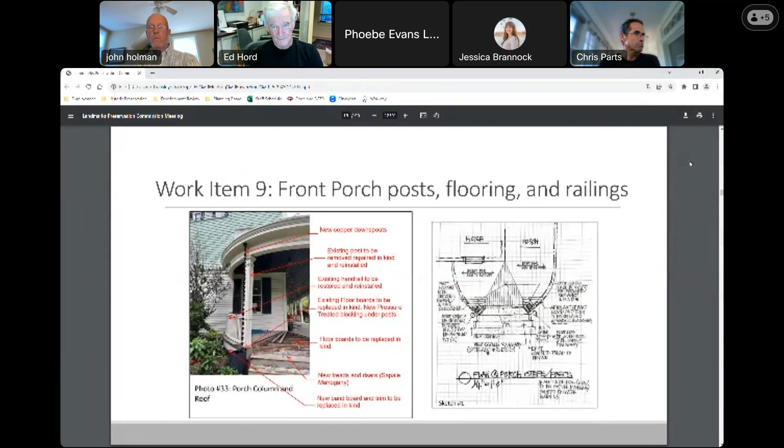And then the next is agenda item number 6. This is the Watkins property at 709 Clifton Road, Sudbrook Park, County Council District number 2. This is a contributing resource in the Sudbrook Park County Historic District, and the applicants are proposing an amendment to their previously approved Part 2 tax credit application for additional repairs and in-kind replacements to the front porch. Staff recommends to vote to issue a certificate of appropriateness as proposed, citing Baltimore County Historic Design Guidelines, Porches and Steps, pages 1 through 6, County Code Section 32-7-405 and

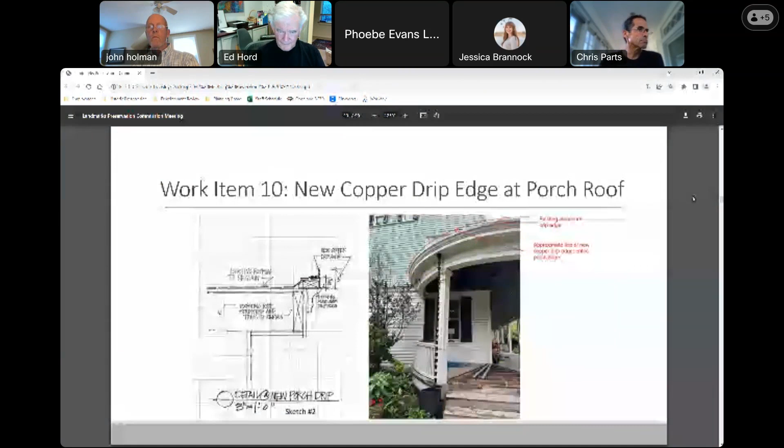11-2-201. Next, we have agenda item number 8, the Beverly property at 16202 Corbett Village Lane in Monkton, County Council District number 3. This is a contributing resource in the Corbett County Historic District, and the applicants propose to replace their non-historic metal barn roof. Staff recommends issuing a certificate of appropriateness as proposed, citing Baltimore County Design Guidelines, roofs, pages 1 through 13, County Code Section 32-7-405.

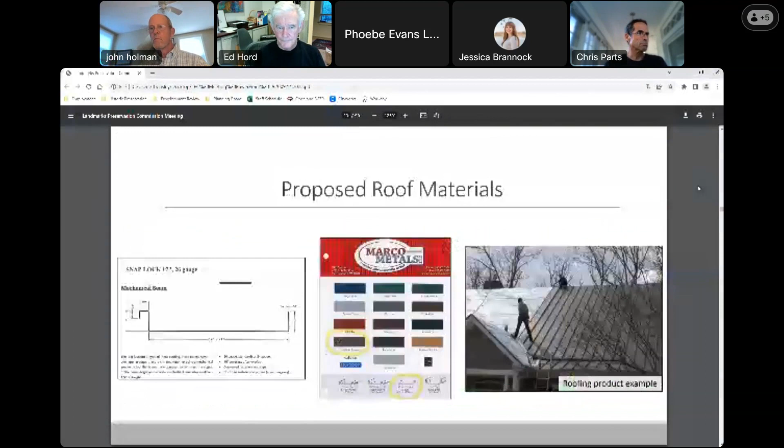Next, we have agenda item 11. This is the Quinn Oakham property at 110 North Beechwood Avenue, County Council District number 1. This is a contributing resource in the Old Catonsville National Register Historic District, and the applicants are seeking Part 2 tax credits for exterior gutter replacement. Staff recommends issuing a certificate of appropriateness as proposed, citing Baltimore County Historic Design Guidelines, roofs, pages 1 through 13, County Code Section 11-2-201.

Then we have the Carpenter property, agenda item number 12. This is located at 713 Pleasant Hill Road in Ellicott City, County Council District number 1. This is a contributing resource in the Oella National Register Historic District, and the applicants are seeking tax credits for repairs to the original German siding, exterior doors, porch, and windows. Staff recommends issuing a certificate of appropriateness as proposed.

And finally, we have agenda item number 13. This is the Bacon Crosby House at 2939 Monkton Road in County Council District number 3, final landmark number 62. The applicants propose to repair 5 existing windows and replace 31 non-original windows. Staff recommends issuing a certificate of appropriateness as proposed.

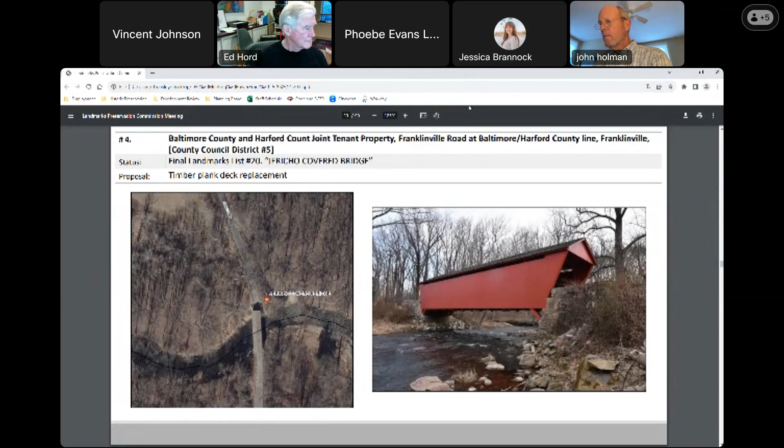So agenda item number 4, the Jericho Covered Bridge. This is a Baltimore County and Harford County joint tenant property at the Franklinville Road and Baltimore Harford County lines, County Council District number 5. This is final landmark number 20. And the applicants propose to remove and replace the timber decking and curb and scupper blocks on the bridge.

Just for some background, the bridge is an 86 by 13 foot Burr arch truss bridge that was constructed across the Little Gunpowder Falls in 1865 and connects Baltimore and Harford counties. The bridge was added to the final landmarks list on October 31st, 1978 through Council Bill number 101-8.

The existing bridge decking is 2x4 transverse timber planks nailed together on the vertical side. The existing decking was previously replaced in 2015 during a major rehabilitation project. The $1.7 million project was funded primarily by a grant from the National Historic Bridge Preservation Program, with Baltimore and Harford counties each funding a small portion. The 2015 rehabilitation project went through extensive reviews by the Maryland Historical Trust to ensure that the work met the Secretary of the Interior standards for rehabilitation.

Baltimore County Department of Public Works has requested to replace the current wood decking system. The application indicated that poorly connected deck planks, combined with the daily vibrations of traffic, have caused the planks to shift sideways, creating wide gaps between the ends of the planks and the bridge curb blocks. This has led to safety concerns for vehicles and pedestrians. In addition, several planks are showing signs of wear and tear, such as splitting off.

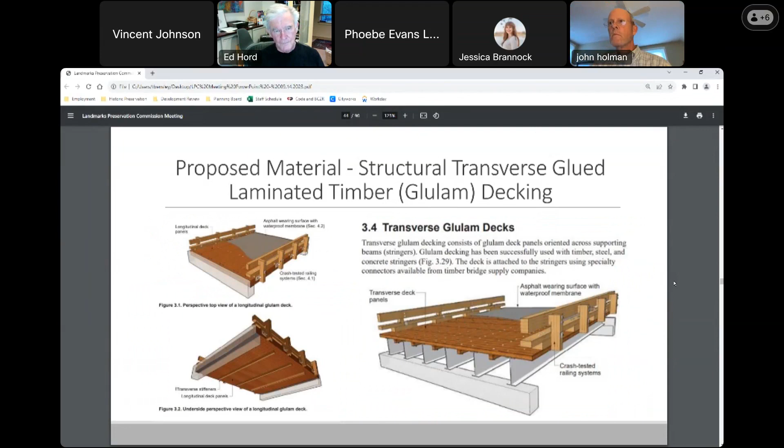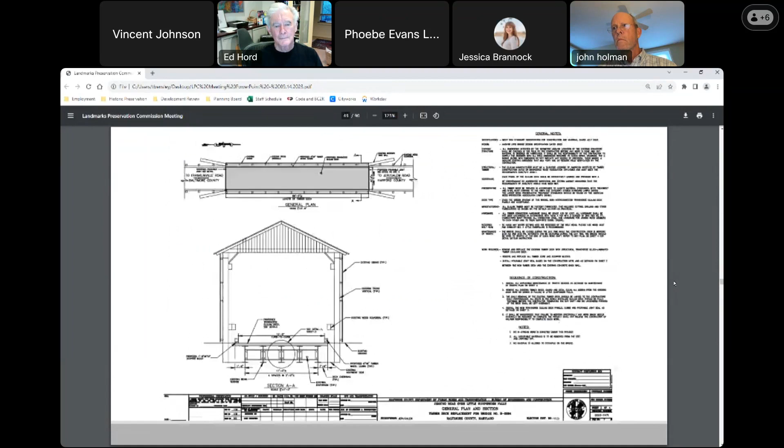The LPC has approved composite decking for historic porches on a case-by-case basis when the proposal replicates the width, profile, and other visual qualities of the existing material and doesn't cause a great adverse impact to the historic resource as a whole. The National Park Service's Supplemental Resource Guidelines for Rehabilitating Historic Covered Bridges recommends replacing in-kind or with substitute material only those portions or features of the floor system that are extensively deteriorated or missing, instead of replacing the entire floor system. It is not recommended to upgrade the bridge structurally in a manner that diminishes the historic character of the floor system, such as replacing floor beams or decking with non-wood materials or engineered timber.

While staff appreciates the applicant's desire to maintain safety, the current proposal does not meet our design guidelines, nor the Secretary of the Interior standards for rehabilitation for historic covered bridges. The proposal does not mention any kinds of repairs to the existing planks, nor does it propose the in-kind replacement of any deteriorated planks. In addition, the proposed replacement material does not replicate the existing plank width, texture, or other visual qualities of the existing decking.

Replacement with an alternative material undermines the extensive work that was done less than 10 years ago and will have detrimental impact to the original design intent of the bridge. Staff recommends to not issue a certificate of appropriateness, as the current proposal does not meet our guidelines nor the Secretary of the Interior standards for the reasons stated above.

Staff recommends that the applicant review the National Park Service's guidelines for rehabilitating historic covered bridges and return to the commission with a proposal for repairs to the shifted planks and in-kind replacement of deteriorated planks. So again, staff recommendation is to vote not to issue a certificate of appropriateness as proposed, citing Baltimore County Historic Design Guidelines, Porches and Steps, National Park Service's Guidelines for Rehabilitation of Historic Covered Bridges, County Code Section 32-7-405. Thank you.

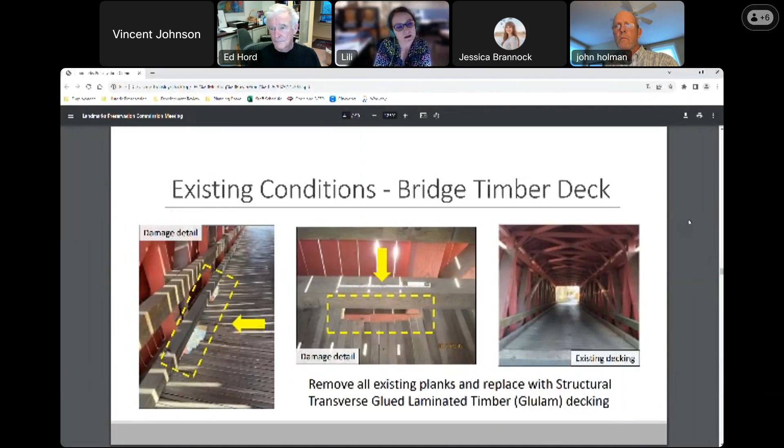And I agree with Ed that I think maybe what was replaced either is not the same thickness, or maybe the way it was connected is not quite what they originally had. So maybe there is a way to go back to installing something that can in fact last longer without the need to have the glulam. I understand that from a structural and heavier traffic standpoint, maybe you would need to shift, but I think there needs to be more investigation as to what was there originally, how long it lasted, and why it failed in a shorter amount of time. So rather than going full force and replacing it all with a newer material, it's about figuring out what the options are as far as the decking.

Good, thank you. I should insert that we had a friend of the court letter from the Harford County Landmarks Preservation Group that concurred with our staff, saying that it was not appropriate. And this bridge spans the river that's the dividing line, so I think technically they may have jurisdiction for some part of it over the water as well.

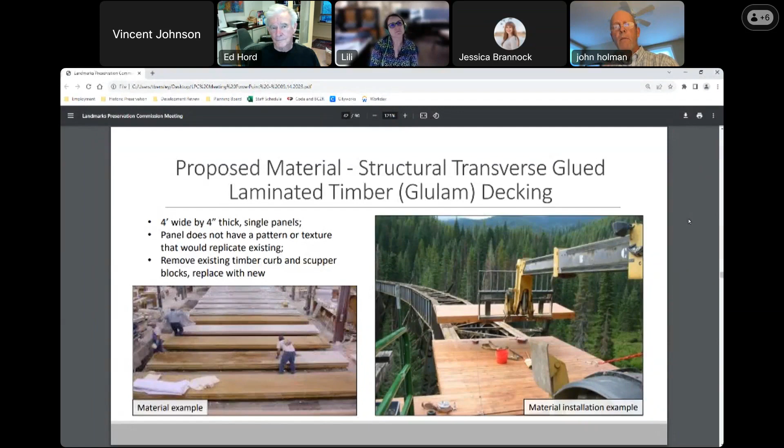Hearing the comments I've heard, do we have a motion to approve the staff recommendations? I would move that we approve the staff recommendations and do not issue the certificate of appropriateness as noted in the recommendations. Thank you, Chris. A second? I second. Thank you, Lili.

A second. So a vote yes, just to remind the commissioners, doesn't mean yes, they can go ahead. It means no, they can't go ahead. We're approving the, not to issue a certificate of appropriateness.

Can we have a roll call vote, Jessica? Yes, and just to note, John, Chris Weston has joined the meeting online. Yes, I cut him off on my phone once he sent me that. I wasn't trying to be rude, Chris, but I took you at your word. Thank you.

Can I have Chris Parts, please? Yes. Ed, Yes. Jamie, Yes. Lily, Yes. Phoebe, Yes. Vince, Yes. Chris Weston? You're muted. Yes. There you go. Thank you. And John, please. Yes. Great, thank you.

Okay, moving on to agenda item number 7. This is the Karas property at 504 Sudbrook Lane in Sudbrook Park, County Council District number 2. This is a contributing structure in the Sudbrook Park County Historic District. The applicant proposes an in-kind vinyl siding and shutter replacements.

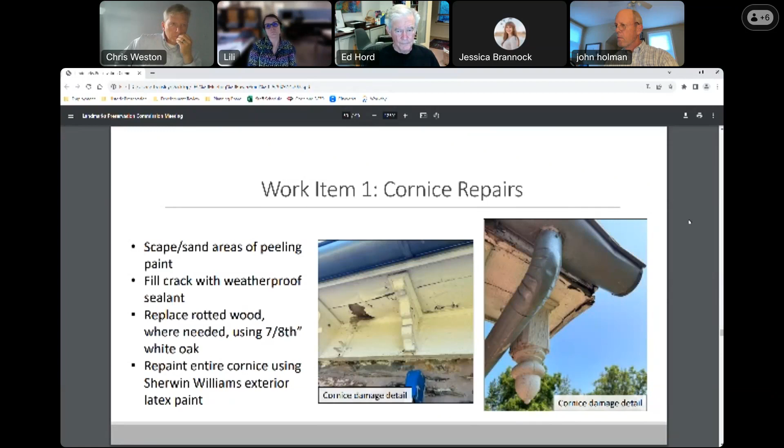Moving on to work item number 2, gutter and downspout replacement. The existing gutters on the south side of the house are 6-inch half-round galvanized steel that have rusted and pitted with holes. The applicant proposes to replace the existing section of gutter and associated downspouts in kind with new gutter and downspouts of the same size and material. Work item 3 concerns the dormers.

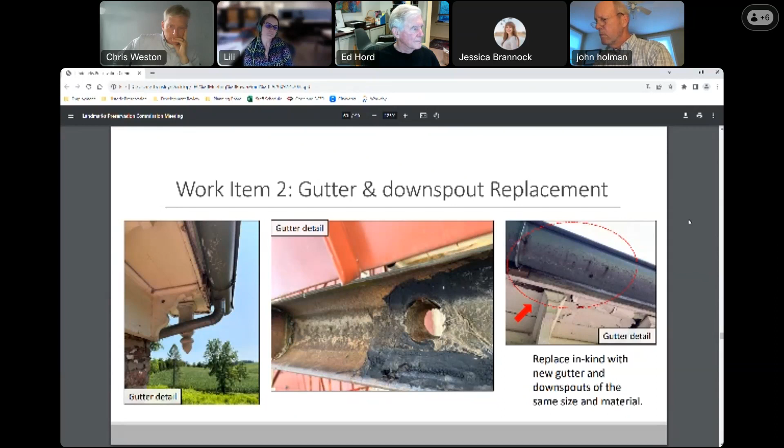There are 6 existing gable dormers clad in German wood siding with standing seam metal roofs that match the main house roof. There are 3 dormers on both the north and south roof slopes.

The existing siding shows evidence of rot in the lower corners due to improper flashing. In addition, the paint is showing signs of wear and weathering throughout.

The applicant proposes the following: to remove the rotted portions of siding only and replace in kind with new fir siding, reflash where needed using metal remaining from installation of the current roof in 2010, and repaint dormers with Sherwin-Williams exterior latex in the colors Creamy for the trim and Downing Sand for the siding.

Staff feels the proposed work description lacks details, but feels the proposed work will meet our design guidelines if the following conditions are met: first, replacement of siding should match the historic wood siding in shape, profile, finish, design, detail, and dimension.

Second, wood surfaces should be prepared for painting by removing any cracked or peeling paint by the gentlest means possible, such as hand sanding in conjunction with chemical strippers, which is generally recommended. A number of commercial paint stripping agents are available of varying strengths and purposes; select the agent most appropriate for the materials and conditions of the building, and do not sandblast or pressure wash wood surfaces.

Finally, number 3, wood surfaces should be primed prior to repainting. Staff recommendation is to vote to issue a certificate of appropriateness with the conditions outlined above, citing Baltimore County Historic Design Guidelines: windows and doors pages 1 through 8, roofs pages 1 through 13, and facade materials pages 1 through 12, County Code Section 32-7-405 and 11-2-201.

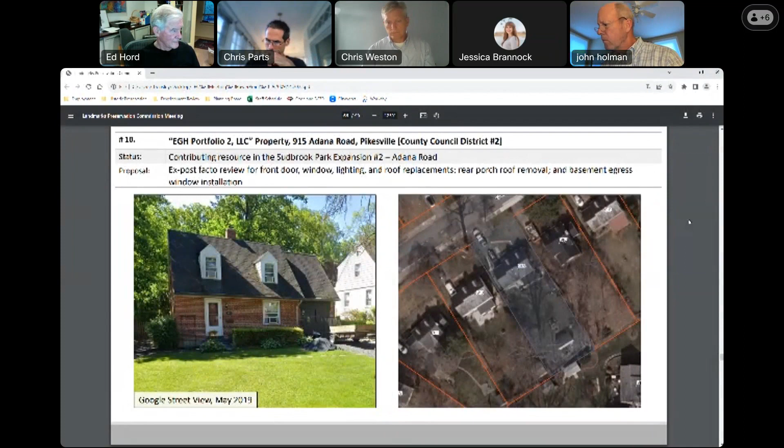This is an ex post facto review for the front door, window, lighting, and roof replacements, as well as the removal of the rear porch roof and the installation of a basement egress window.

The property at 915 Adana Road is a two-story brick dwelling constructed in 1942 and is a contributing structure within the Sudbrook Park County Historic District expansion, Number 2, Adana Road. The property was purchased by Evergreen Homes, EGH Portfolio 2 LLC, in February of 2023.

Staff became aware of the alterations made to the exterior of the home when a permit was submitted for a basement egress window opening in August 2023. A code violation has not been filed for the work previously completed. The present proposal includes information about work completed without LPC review, including window, front door, and roof replacements, rear porch removal, and basement egress window.

Work item number 1 is the front door replacement. The previous front entry door was wood and can be seen in old real estate photos, which staff has provided to the commission along with the meeting materials packet. From that photo, staff notes the previous front entry is not the original door; it was a flat door without panels and a diamond-shaped light at the top.

The previous front entry was replaced with a 36 by 80 inch Craftsman unfinished smooth left-hand swing fiberglass door. The prevailing front door style in the district appears to be a single leaf with divided lights on the top half and paneled at the bottom half. While the replacement door does not match the prevailing style and is not the most appropriate choice, staff does not feel it is a substantial detriment to the district and recommends approval with a notice to proceed as completed.

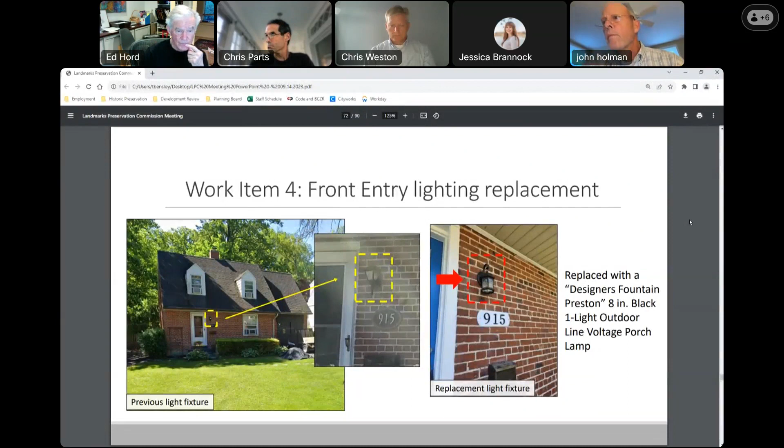Work item number 5: the basement egress window. The basement has been finished and includes a separate bedroom. The basement currently only has 2 window openings, one on the front elevation below the living room window and one on the side elevation. The previous window was too small to be considered egress size at 31.5 by 31.5 inches, and because of code requirements for having a basement bedroom, an egress window well was installed using the existing opening on the front elevation.

The window well measures 36 inches from the building front with a depth of 44 inches, with a permanent ladder. It will have a low profile cover built on an angle so as to divert water away from the property, and it will also be hidden by the landscaping and mulch garden around it. Staff recommends approval as completed.

Finally, work item number 6: the rear porch removal. Though not described in the application's description of work section, it was noted in the photograph submitted by the applicant. A ground level concrete patio located on the rear had a 1-story shed roof supported by simple wood posts that appeared unstable. It was removed, and staff has no issues with its removal, as it's located in the rear, and recommends approval as completed. So the following staff recommendations are as follows.

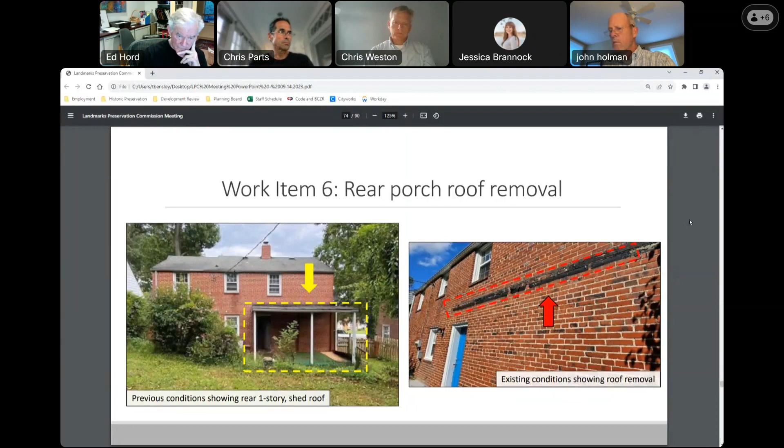For work item number 1, to issue a notice to proceed as completed.

Work item number 2: issue a notice to proceed as completed for the window replacements on the side and rear elevations only, and not issue a certificate of appropriateness or notice to proceed for the window replacements on the front elevation, but instead issue a certificate of appropriateness for the removal of the vinyl windows on the front facade, which include the two 6/6 dormers and one 6/6 living room window, to be replaced with new windows that match the original in material, light, sash, and other components.

Work item number 3 through 6: issue a notice to proceed as completed, citing Baltimore County Historic Design Guidelines, windows and doors pages 1 through 8, roofs pages 1 through 13, County Code Section 32-7-405. Thank you, Jessica.

It's a lot to take in. Is the owner or representative with us? Let me pull up our attendees list. Yes, we have Spencer Brown and Greg Mogavero from Mogavero. Spencer Brown, we're on the line.

Great, thank you for joining us. I'm going to turn it over to the commissioners to see if they have any questions or thoughts, and we'll come back to you as needed. I think the staff recommendations are spot on. Thank you, and any other thoughts?

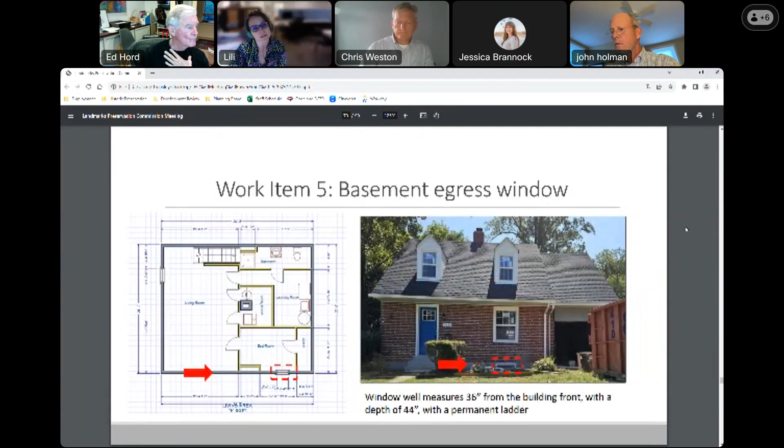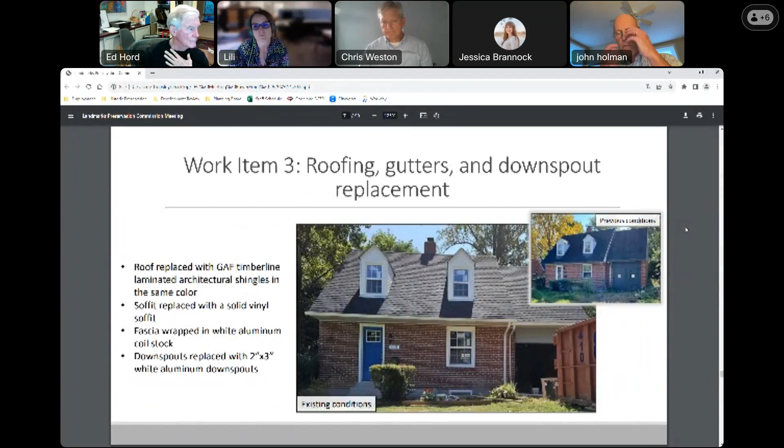I have a question on the garage doors. Are they remaining currently, or have they been replaced? Yes, the garage door has been replaced to look exactly like the garage door that was originally there. The garage door that was there was in disarray, we had to remove it. It was unsafe, not hinged properly, and looked like it could have caused injury. So we removed it and rebuilt it to look exactly like the old existing one and the ones across the street.

They all match. So is it an overhead door or carriage door? No, it is a barn style door, left and right opening out, with a latch in the middle. The hinges are very similar to what was there, black hinges, and there's a black handle on each door. Okay, thank you. Thank you, Lili.

Any other questions or concerns? I have a problem with the side windows as well, because I think you'll be able to see those from the street. The front ones are certainly the most important, and definitely those should be replaced with wood to match what was there originally. But I would add the side windows because I think they're visible, unless I'm missing something. I'll go with the consensus, but I would.

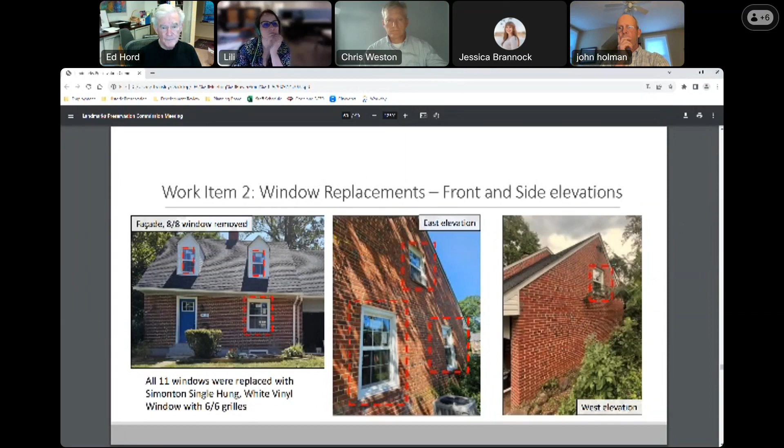So do we have a better picture, Jessica, a different picture that shows a street view that might help Ed with that thought? Some of our images were taken from street view, I can try to pull something up. I think you had one, particularly the west or east side. Let's move up to the second slide. Yeah, that's pretty visible, sort of at an angle. Is that what you mean, Ed, where you can see it? I think it's pretty visible from the street.

Any other commissioners share that concern? Maybe not. Okay, then consensus. I can't quite tell which angle we're looking at, but certainly there is a way for you to see them from the street.

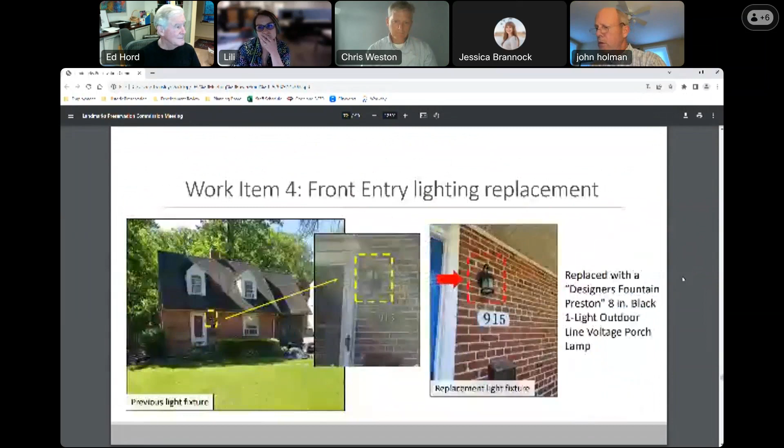Hearing no other comments, do we have a motion to approve the staff recommendations? I move that we approve based on the staff recommendations. Second. Thank you, Chris, and thank you, Chris, for that. So may we have a roll call vote? Chris Parts, please. Yes. Ed, please. Yes.

Jamie. Lili, yes. Edie, yes. Vince, yes. Chris Weston, yes. And John, please. Yes. And to the owners, thank you so much for joining us and being available for questions, we really appreciate that. Thank you.

Thank you. And I would just note to the owners that the work to the garage door, which was not detailed in the application, will also need to come back for ex post facto review by the LPC. Okay, thank you. Okay, all right, thank you, great, thank you.

All righty, and now we are moving on to agenda item number 14. Wow, all right, that's it. Yes, our last one, you're doing great, Jessica. If you can just keep the stamina up, didn't think we'd see the day.

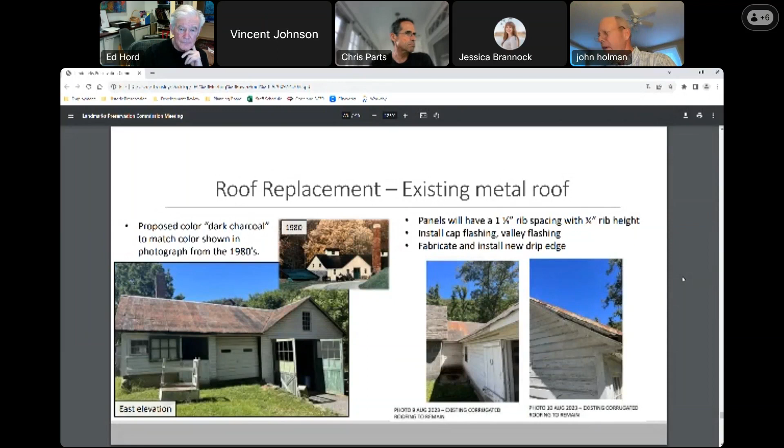Thank you. It's a fascinating building. Are the owners with us? Yes, we have Lisa Reed on call. Lisa, you're unmuted if you have anything to add.

Hi, can you guys hear me? Yes, we can, Ms. Reed. Thank you. Do I have anything to add? I think I will not add anything at this time. Okay, thank you for listening. I'm very excited to start work on this building. I'll open it up to the commissioners for any questions, comments, or thoughts.

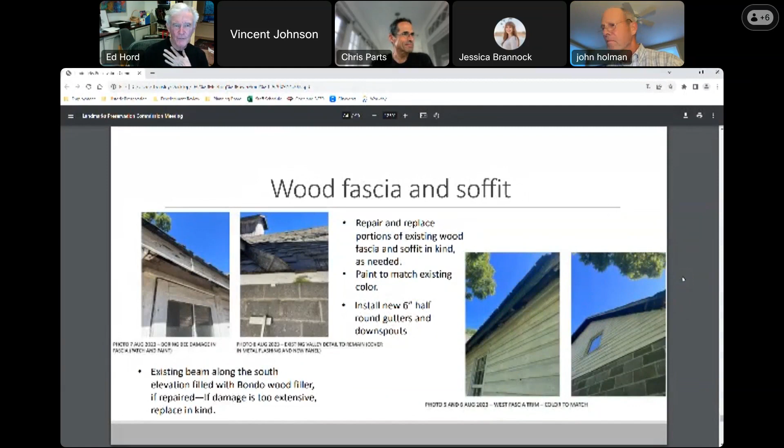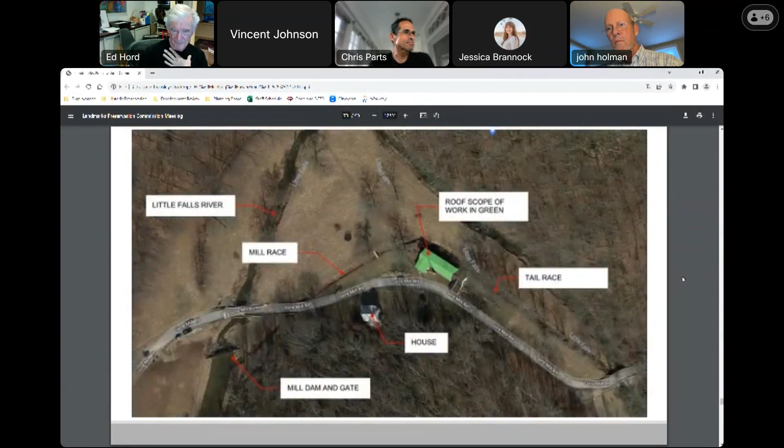What's the new use for the building? What are you planning on doing with it? My husband and I have a few ideas. It's much larger than either one of us will need for our professions. He's a carpenter, woodworker, and general contractor, and I'm an architect. We will probably use the interior, which is still just a dirt floor, for a shop space.

Currently, the image you see right now is that front portion with the double green doors. There's a little shop in there for my husband. I'm extremely interested in getting the wheel turning and producing electricity. In the 40s, the previous owners turned it into an electric generating wheel rather than using the space to continue making paper, which it had been historically. I'm very interested in reviving the wheel that still exists to generate electricity, possibly as a kind of learning experience for the community. Wow, very nice.

Very nice, Lisa, you'll see me again. Lisa, can you talk about the reason for leaving the existing corrugated roofing on the building and roofing over that? I'm just concerned that you're doubling the load—are the rafters designed to support that? I might do a little bit more investigation on that.

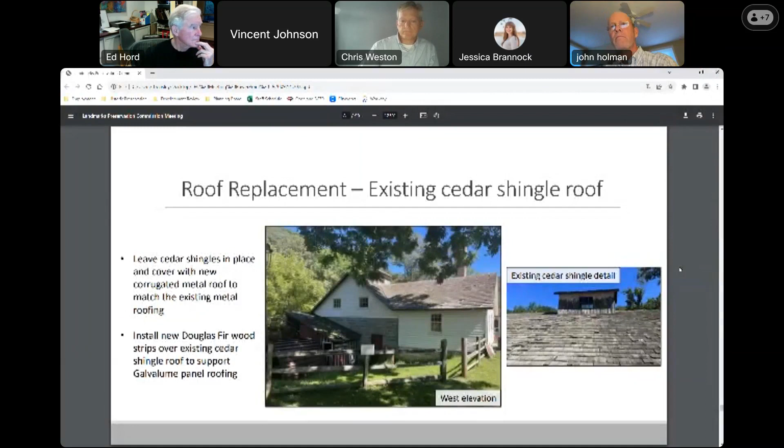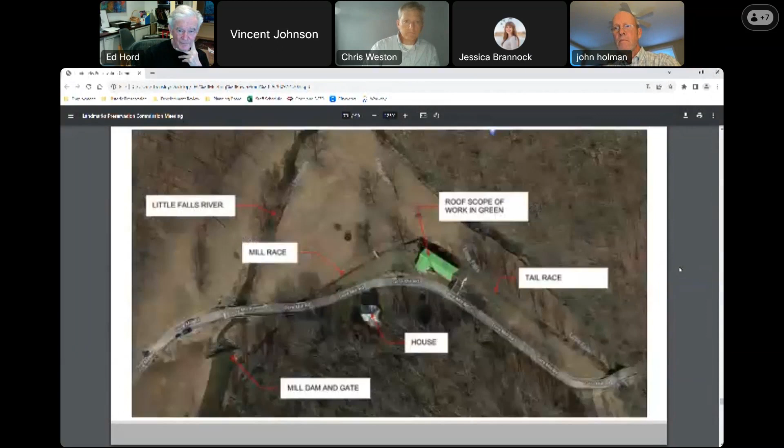Hearing none? I just have one comment. It's a really beautiful building. It's intriguing. I'd be interested in seeing what happens going forward. Well, she just promised us she'd be back, so more will be revealed, I'm sure.

So may we have a motion? I guess, may I ask one more question? Sorry to interrupt. The portion of the building that includes the existing corrugated metal, it doesn't necessarily need to be replaced right this minute, and I don't want to pay for that section to be replaced right now. But in the near future, if it does get replaced, do I need to come back to you to get that approval?

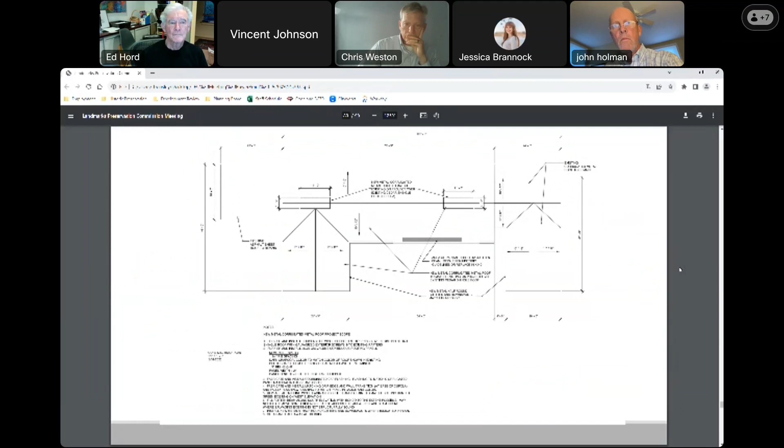Yeah, Lisa, you can hold off on any part of your project until you're ready. The only time you would need to come back is if it's something that hasn't been proposed before. I don't think it was proposed. I think in my proposal I do not include that portion. I see. Then if I do, yes, I need to. Okay. Yes. Okay.

Hopefully when that happens, you will not be at the very end of a long agenda. Oh, it was so interesting. I loved it. It was fun. I'm into it. Thank you. Thank you.

Always good to call ahead whenever you want to do any work on it, and Jessica and Caitlin can advise you. But thank you.

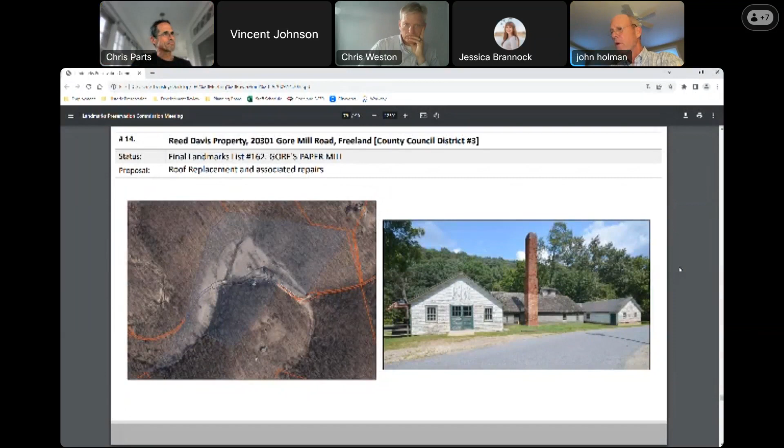Okay, commissioners, do I hear a motion then? I'll make a motion. I move to issue a certificate of appropriateness as proposed. Thank you. A second? Second. Thank you. Chris Parts, roll call vote please. Could we please have Chris Parts, yes. Ed, yes. Jamie, yes. Lili, yes. Phoebe, yes. Vince, yes. Chris Weston, yes. And John, please. Yes. Great.

Thank you so much. And we have some tax credit applications. You want to run through those? Yeah. So we have four applications. The first is the Naylor property at 4001 Stewart Road. This is a contributing property in the Green Spring Valley National Register Historic District, for Part 2 approval for electrical upgrades, including a 400 AMP upgrade, roof repairs, chimney recap, carpentry repairs and painting, well house siding, and cold frame repairs, County Council District number 2.

Then we have the Devaney property at 506 Murdoch Road. This is a contributing property in the Anneslie National Register Historic District, Part 2 approval for a new HVAC system, in County Council District number 6.

Then we have the Milan Plinlimon property at 9401 Lyons Mill Road. This is final landmark number 70, National Register individual listing commercial, Part 2 approval for extensive interior and exterior commercial rehabilitation, County Council District number 4.